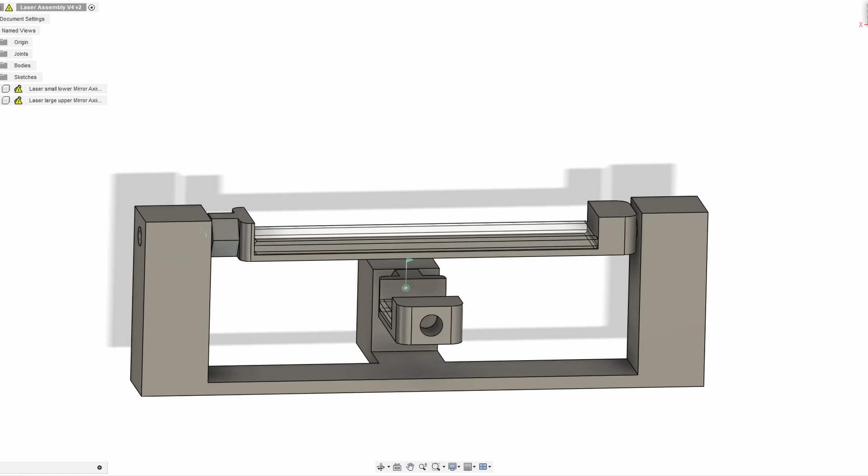For my first mirror prototype contraption, the basic shape was already clear. There are many holes that I used to test out how far I need to space out the mirrors. Turned out, they work best when spaced as closely as possible. From there I sketched out this very basic shape consisting of nothing more than a few rectangles and holes to mount the mirrors. In the next step I added those mirrors, and you can see the small lower mirror has holes on both sides, since I derived that design from the initial prototype and didn't check that I don't need that second hole.

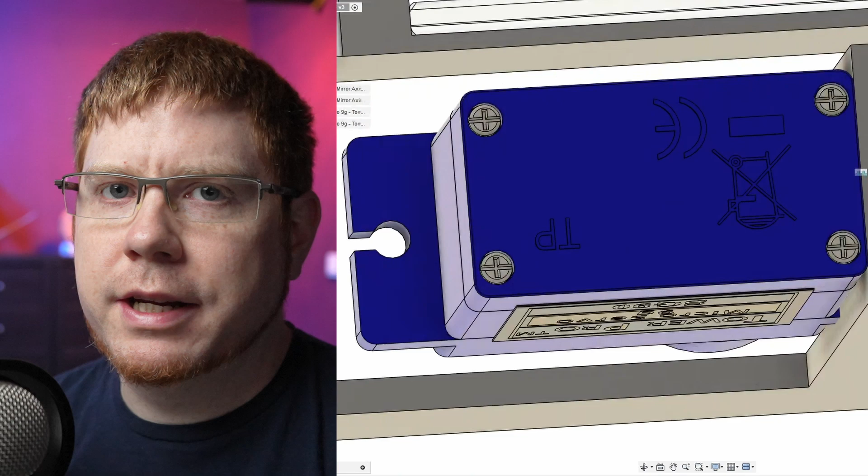To get a better feeling for the physical space I need, I downloaded the servo model from Thingiverse and added it to the design. In this first iteration I just placed them somewhere and they are still clipping inside the body. By the way, the extrude tool alone accounts for 90% of this design. The rest are holes and a few chamfers.

To see how far I need to space everything out, I started to add the gears. For that I used a tool called GF Gear Generator. You only need to input a few parameters and it will create the whole gear for you. The only thing I still needed to add was the hole to fit the gear onto the servo.

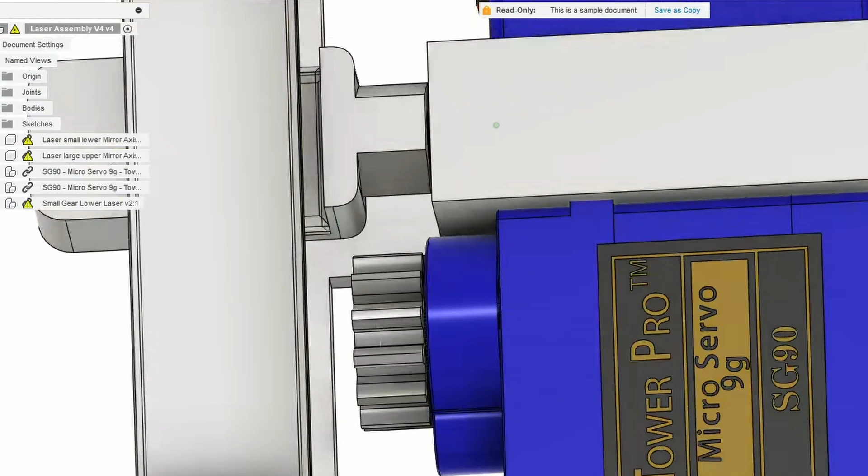For the mirror axis I added hex connectors so I can print the gears and the mirror axis both separately, meaning I can print it flat on the print bed without needing any support material. I was aiming for a 1:3 gear ratio from the servo to the mirror axis, so I can make the choppy movement of the servo a bit less choppy. Having the gear on the mirror axis a bit larger than 3 times the one on the servo is also no problem. The main goal was that the two mesh and move smoothly.

You can see the gear on the mirror axis is still colliding with the initial sketch of the frame, but that's a problem to solve later. I added a few more rectangles to the base sketch to have a mounting point for the servo. You can see it still consists only of rectangles and a few extrusions.

From the motion simulation you can now see how far the mirror can move. I limited the movement of the servo to 180 degrees, like it is in reality, and you can see that the mirror is already moving far enough.

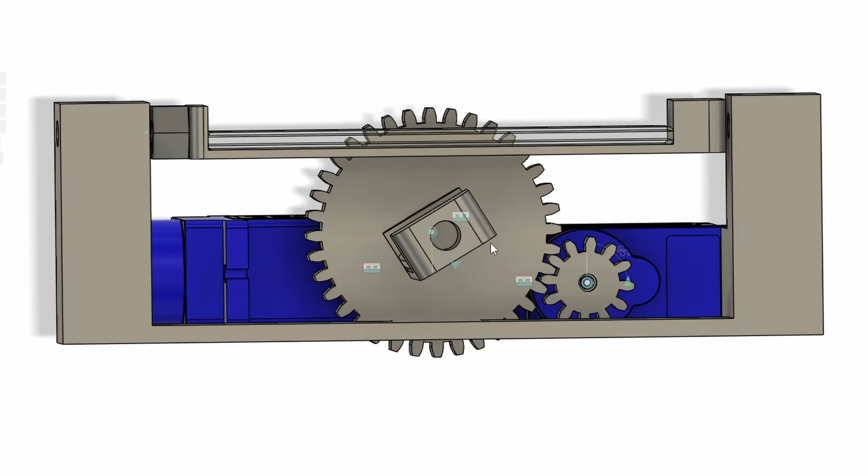In the next step I added a second mounting point for the servo and also made sure there is enough clearance for the cable. You can see I opted to mount the servo screws on one side from the front and the other from the back, because that is what fits best to this design.

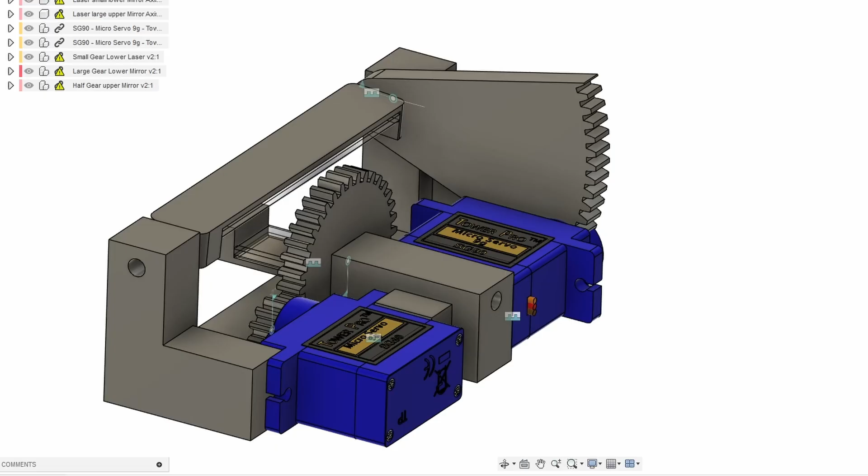For the second servo I used the same gear that I added for the first servo, since I wasn't sure how to proceed from here. In the final design that gear is quite a bit larger to fit into the overall design. I knew that I needed a partial gear in order to save space, but I didn't know how that would work out.

So I made a very crude prototype and inserted it just to see how it fits. You see that partial gear doesn't meet up with the servo where the other gear does, so I had two options: making the gear on the servo larger or making the partial gear larger. I opted to change the partial gear.

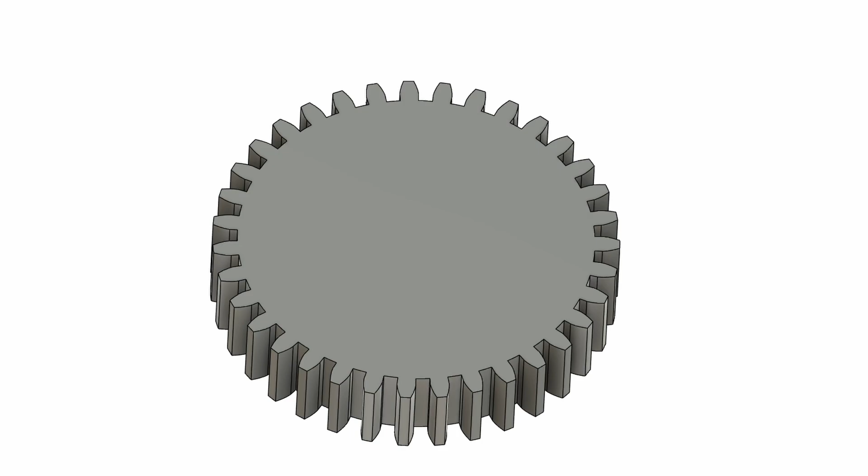Now the gear generator only makes whole gears, so I needed to cut a few things away to get a partial gear. I opted to also make it a bit thicker and then cut out a part of the body in order to have it a bit offset from the center point of the servo. I also added markings on the gear and the mirror axis to indicate how that thing needs to be put on. In order to make my design work, the gear on the servo needed to be larger than the base of the servo to avoid collision.

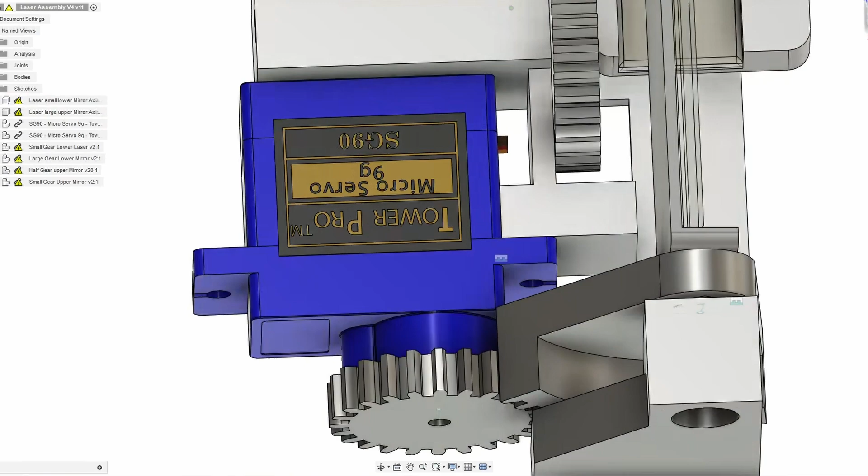You also see that I switched the servo around 180 degrees to be closer to that partial gear. From the motion simulation you can see that the range of movement is still plenty with this setup.

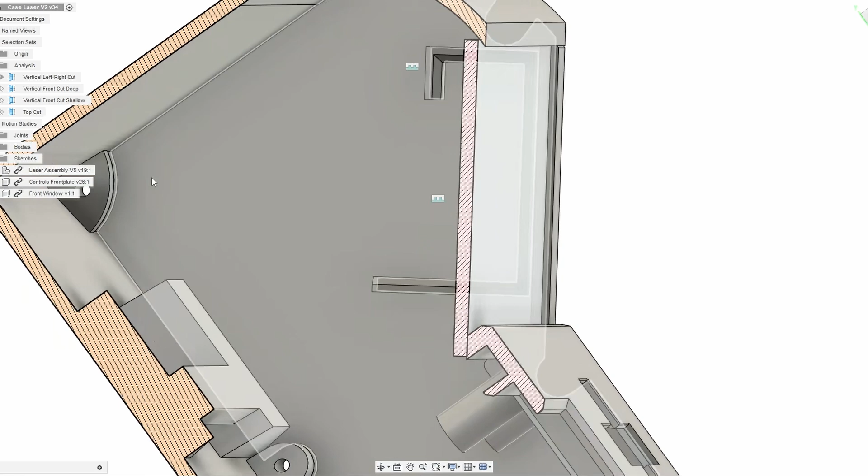In this step I also added a hole for the laser diode and created a distinct shape that the laser cage has on each side. The reason for that distinct shape is that I added a frame inside the case where you can easily put in that laser cage without having to screw it in. It will simply stay in place because the case is closed and screwed in on both sides.

Now with the motion system working, I needed a place to screw in that second servo on both sides. And I also made sure that the gear for the small lower servo was movable and removed that one part of the frame that was in the way.

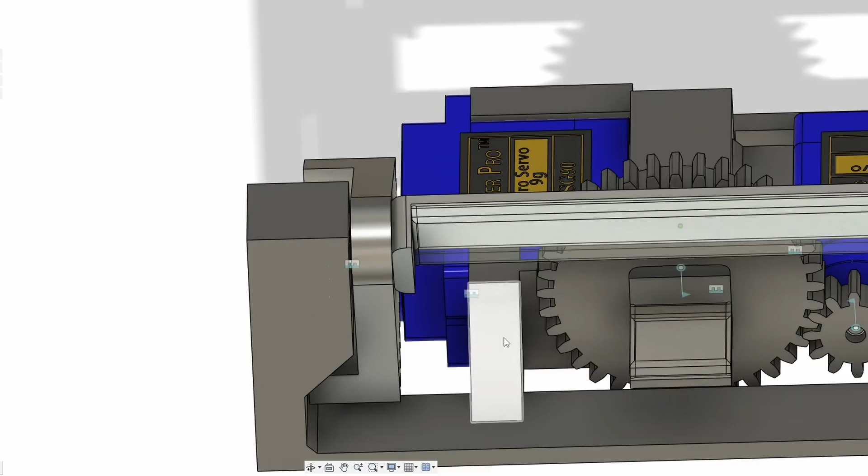With those holders for the second servo, that whole cage got a lot more rigid. The front part of that servo holder is chamfered to not interfere with the laser light, and also because it looks better. For the new partial gear design I also needed to cut out a small piece of the laser cage in order to make it fit through.

To not have the screws of the mirror axis stick out, I also added a counter bore to all of them. But I will also later remove the one for the small mirror axis for reasons I will explain later. At this stage the base design already worked pretty good, but there were still a few details I needed to work out in order to make it work perfectly.

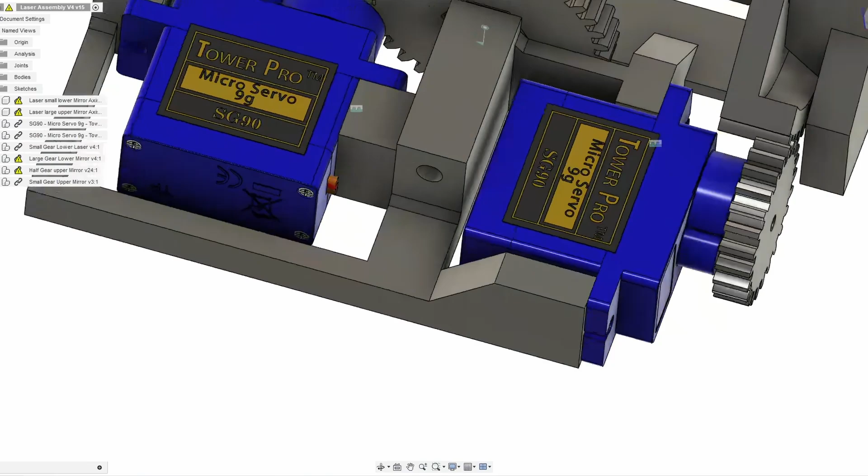I added an additional piece of framing on the side of the lower axis mirror to make the laser cage a bit more rigid. The frame design as it is serves two purposes. One is making the laser cage as rigid as possible, but the other one is also to keep the servo cables from coming in contact with the moving gears.

Now the gear design works in principle, but the teeth are also rather fine, which makes them hard to print. Now in order to make them printable easily, I reduced the number of teeth to the minimum amount possible while still maintaining full functionality. You can also see that through some of the gear's positions, they didn't mesh correctly anymore.

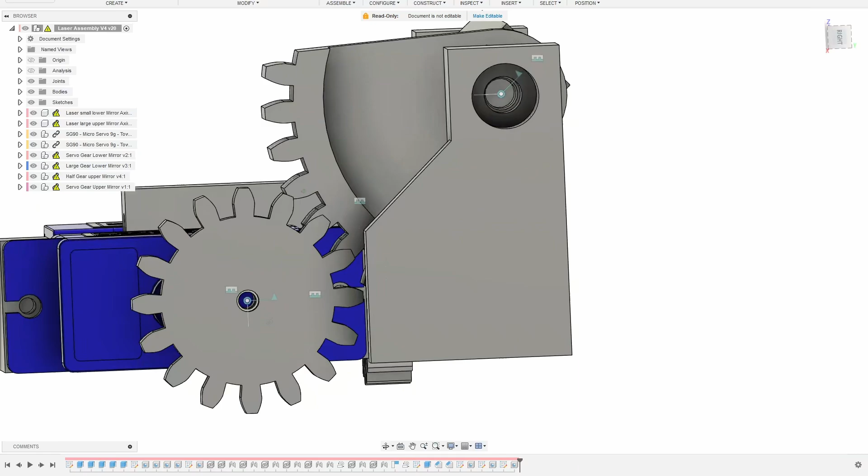Since I had a few other issues in that file, I created a new one and did only the steps that I really needed and omitted the other ones that were made along the way to have a fresh start. In that step I also removed the counter bore for the small lower mirror because it either was too small and created friction, or it was too large and therefore had very flimsy walls, and there wasn't really any physical need for that hole.

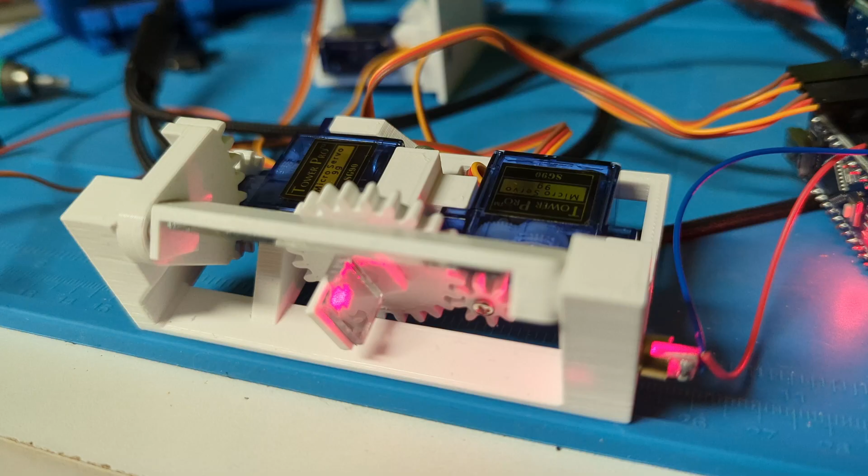While I was building one of the first prototypes, I noticed a few small things that needed to change. For one, the small lower mirror was mounted to a block, and this block could collide with the hex mounting point of the gear. So I needed to make that block a bit larger in order to make it not collide.

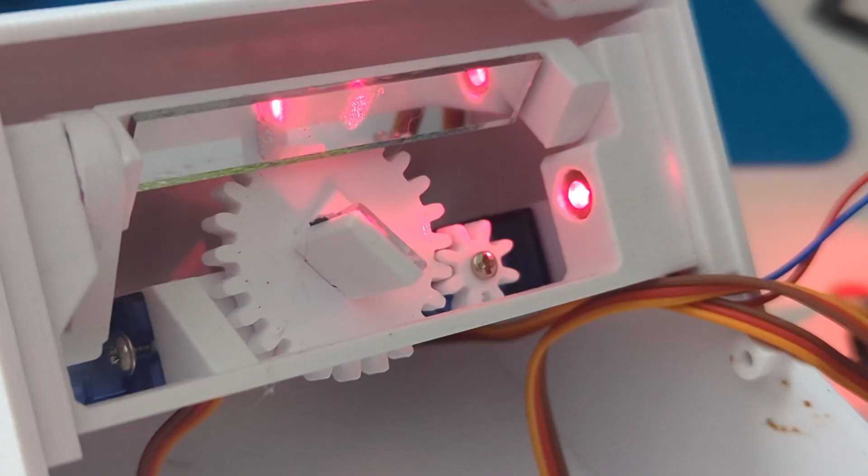The other issue is that the laser was visible from the side, so I made the laser housing a bit longer in order to mitigate that problem. I also added a small channel in order to route the cable of the laser diode easily.

I also needed to adjust the laser's position a bit to prevent refraction of the laser light from the side of the mirror's glass. Since the laser was still visible from the side, I extended the housing yet a bit more. I also added a 45-degree angle to the hole to make it easily printable when flat on the bed.

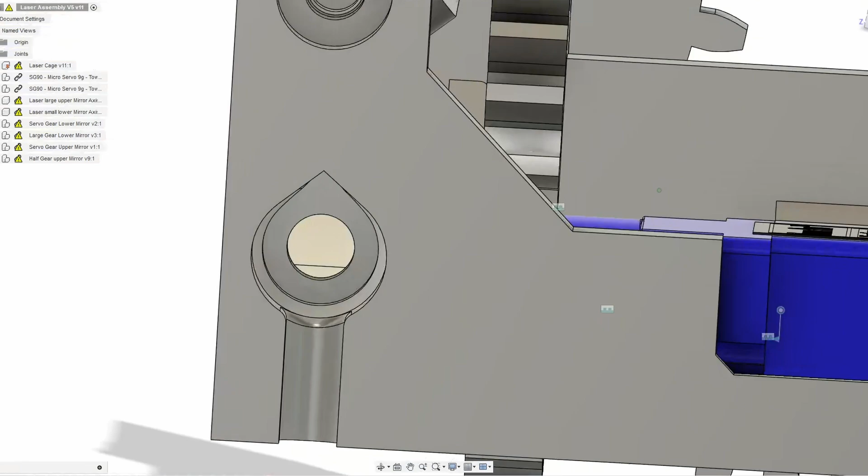While working on the general design overall, I was also constantly working on all the tolerances. Those are very important to make everything fit together properly. I also added a few fillets and chamfers here and there for the professional look overall.